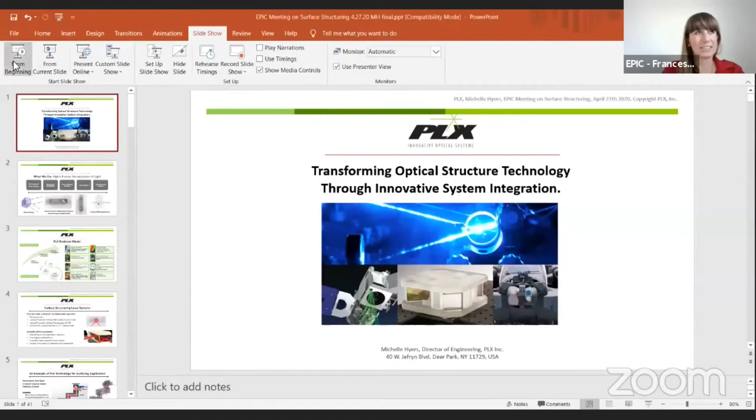Thank you. Hey, so I'm Michelle Hyers, I'm the Director of Engineering at PLX. I'm just going to talk a little bit first about what we do: the manipulation of light.

There have been a lot of talks today presenting how to get the laser beam for surface structuring, so this is a really good application of what we do. Anything regarding beam delivery at really high precision levels, we're talking about sub-arc second, we do a lot of applications in targeting, bore sighting, beam folding, steering, laser systems, interferometry, some of those beams you guys were using for interference to put down those patterns.

We have all different versions. We're really the pioneers of what we call this retroreflector, these invariant optical systems, to basically have the path, shown here on the bottom left-hand side, coming back with these small deviations. And we have all these other systems we've developed: lateral transfer, hollow retroreflectors, periscopes.

But really the heart of what we do, shown on the bottom right, is all these different types of custom OEM applications. So whatever system you guys have, we would provide the solutions that would work for you.

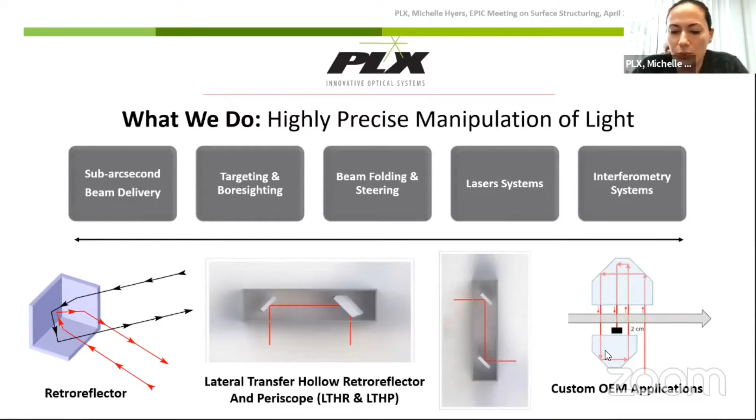In our business model, we really work at the level of assemblies all the way up to system integration. So if you guys have this custom application trying to develop a new laser system for this surfacing, we can really help integrate our technology for your maximum benefit, all the way up to the housing system level.

What we're looking for at EPIC here, and in general, is to really work with our technology and find these key partners that can utilize our technology and work with them to develop different applications.

What we do in-house is engineering, utilizing our technology and expertise to do these high precision optical assemblies and solutions, analysis of those systems with FEA, a lot of environmental testing, thermal vibration shock, and fabrication. We have the optical shop, assembly, coating, clean room, everything you need to really bring that solution and make it.

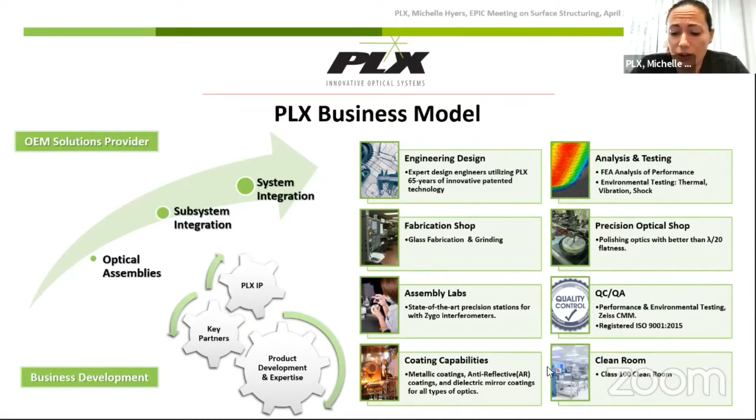That's our proprietary know-how. So in regards to this topic, let's look at some of these systems. For surface structuring, you want to basically deliver the beam and have different benefits of the system. Some of the things we use that are our main core solutions are all these invariant systems. I'm going to talk a little bit about the last one, the MOST, at the end.

There's pentamirrors, there's the LTHR, LTHP that I talked about before. And the MOST is shown on the bottom right. That's really one of our main core technologies: a monolithic structure. Again, invariant, all being very robust in terms of vibration and thermal concerns.

With this solution, we can provide a bunch of different benefits for these laser systems. We can use multiple laser systems. So if you want to switch different beams or use multiple beams, the benefit of the MOST is that it's pre-aligned. Everything in this kind of sandwich structure on the bottom right can basically be put into the system and is extremely accurate. The overall beam deviation goes to the sub-arc second level.

So you can basically put in this kind of plug and play optic, you don't have to worry about adjusting everything. And it's very highly stable in thermal and vibration conditions. If you're worried about doing high scan speeds, high power heat issues, or vibration issues, these sort of products are used - a lot of our applications are actually military defense, so these are battlefield condition-ready optics.

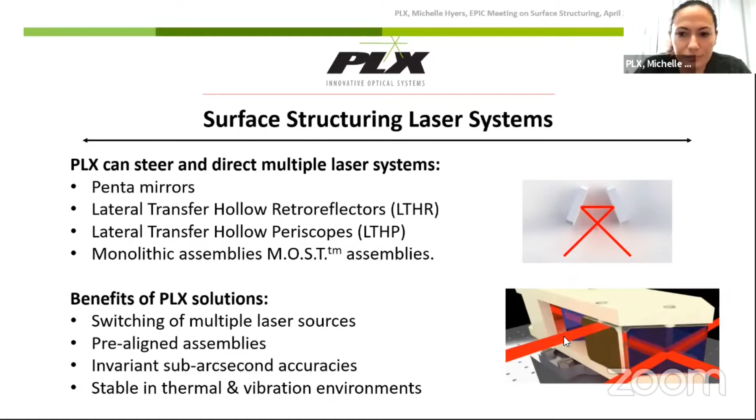So an example to look at, to see what our optics and solutions can do in this industry: we can look at something like an articulated arm to deliver the optical beam for a laser. In this system, maybe you have two laser beams that you're going to either split between, or it could be an interferometry kind of setup where you can basically have different optics.

This is just one example. We have a pentamirror, but this can be all different types of optics in that first section. And then we can use basically some of our LTHP, stacked in this kind of articulating arm setup, and we can do multiple axes.

But the benefit of this is this invariant system. Because of this, if there's any kind of slight movement or deviation, there aren't these alignment issues that may plague your system. So you should be able to get a much higher accuracy at the beam delivery site. With this, you can move the beam around, you're not moving the workpiece, so you can potentially make a much more compact laser system.

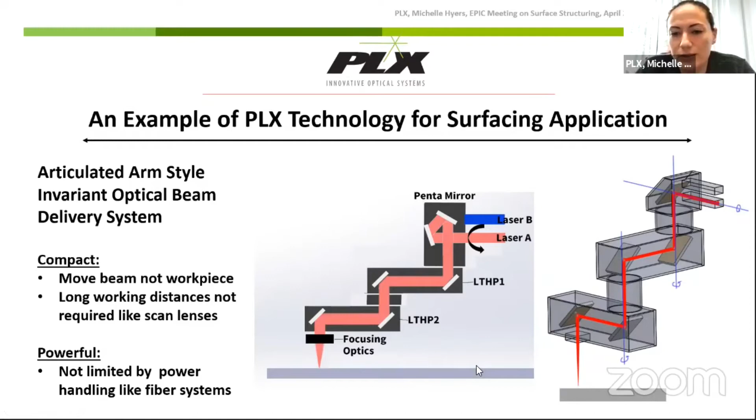If you're doing this instead of something like a scan lens system, you're not necessarily required to have the long working distance, so the system could be much more powerful and compact. It's not limited as much by power handling issues like fiber systems - a lot of its benefit is we can deliver high powered lasers with this. This shows you on the left the physical layout, and I'm going to play this little animation here on the right, hopefully you guys can see it.

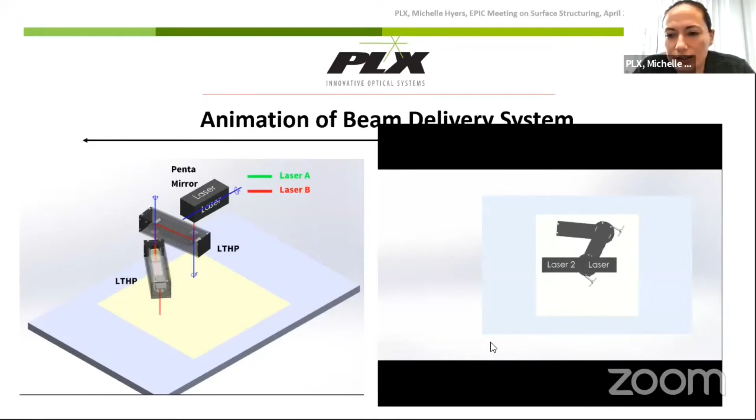So it just shows basically, taking a system, combining some of our high precision assemblies and having a very robust system for laser scanning on the surface. We can do multiple configurations. This is just to give you an idea of one possible version.

With this system, there's a lot of benefits PLX can offer. Because they're front surface mirrors, you have wavelength independence, so if you want to quickly switch amongst different lasers or wavelengths, that's perfect. Beam diameter is usually around 1 to 2 inches, but we can customize it to different scales, so you can get a large power density and low divergence.

The structural design has our elements enclosed and pre-aligned, so you get accuracy. The beam deviation and invariancy I talked about are really important for performance, and that comes with a lot of stability. Most of our systems use athermal designs with CTE-matched materials, so thermal issues, vibration, or shock are not going to be a problem in our systems.

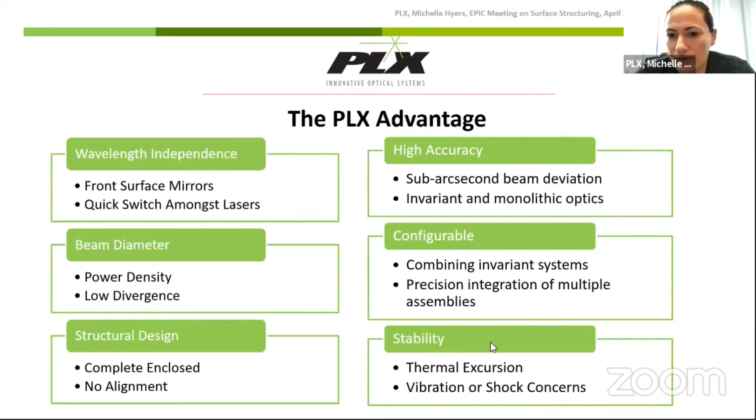So I talked about the MOST briefly, I just want to show a little quick video so you can see exactly what I'm talking about. Maybe it's on the other screen, if you have a second screen. No, it's not doing it. Okay, let me just show you this one.

Basically, if you take a conventional optical bench setup, you can really combine these elements. If you think about this in terms of a surface structuring system, you might have all these different elements that are moving and being adjusted, so there's a lot more room for error and inaccuracies, especially if your system is scanning really fast with vibration and other factors. This really takes those elements out of play and puts it into this kind of sandwich structure.

This is extremely customizable. We've done all different types - this example happens to be glass, but we can do other materials, metals, ceramics. We can do different elements, freeform optics. This could be mirrors, beam splitters, lenses, anything you can configure can be put into this technology.

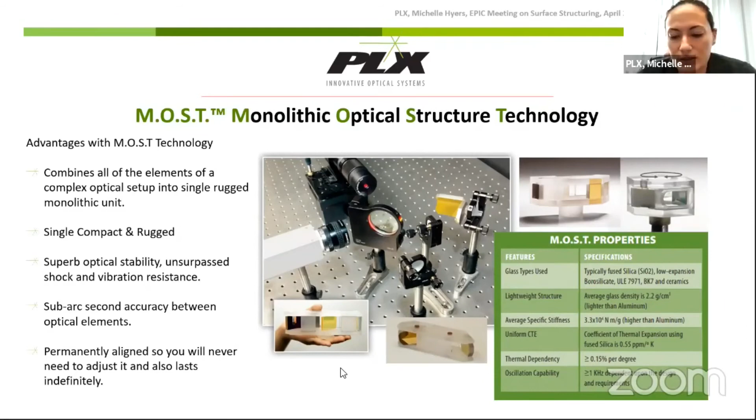Because it's in this one structure, this is very robust. You might think glass isn't as strong, but that's completely not the case. These things have been tested and used in very harsh conditions - vibration, shock, and large thermal ranges. These might be in something shot up into space, or for military applications.

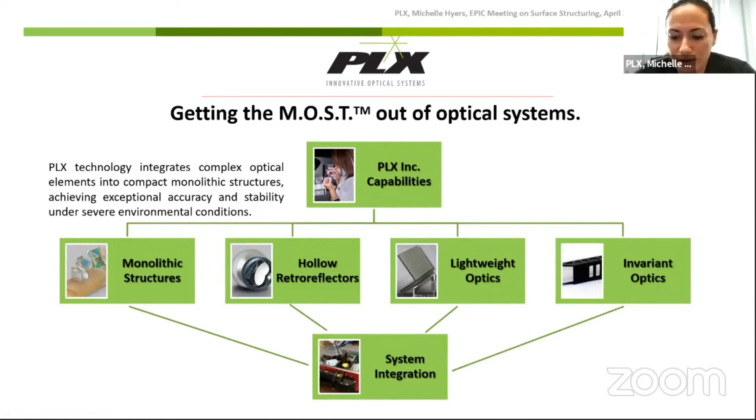I think in this industry, it would be a great fit. All of these different elements of PLX - the monolithic, the retroreflectors, lightweight optics and invariant optics - really come into play at the system integration level, and that's where we can provide the most benefit for you developing these sorts of systems.

Just to give you a quick range of what we can do scale-wise, wavelength ranges, beam deviation, and sizing. Depending on the scale of your system, we've made things very small, down to let's say 2 millimeters. We've also done some opto-MEMS in this industry. And then things up to offset - we talked about spacing of the beams - we can go up to basically meters as well.

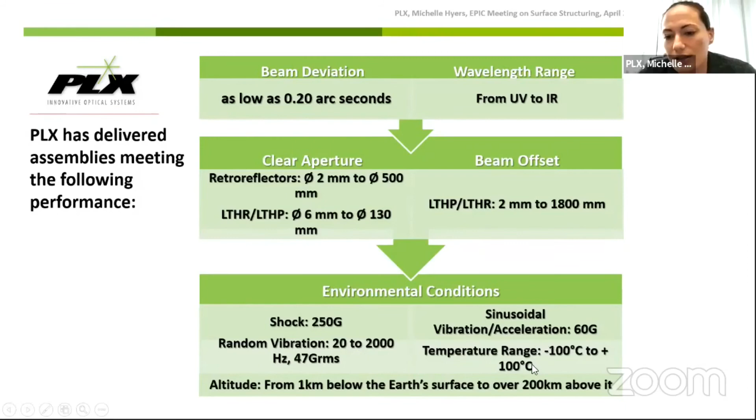And environmental - I mentioned the shock, I mentioned the temperature variation. These are just some of the numbers so you can see what we're talking about in terms of shock, vibration, and temperature range. This is to show you all the different versions of some of the things that we can do.

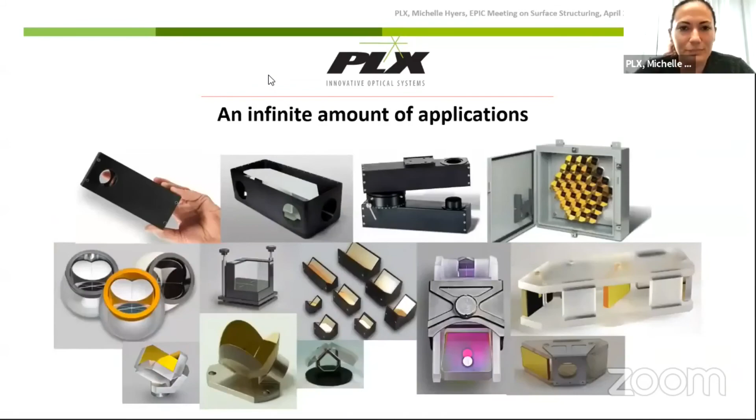Thank you very much, Michelle. Thanks a lot for your contribution. I think it's very interesting for this community that the high power - your systems can stand the high power. You've also put a lot of weight on harsh environment applications. Maybe this isn't for the laser structuring people, but I know, for example, Dietmar also deals with devices brought into different environments. So I guess you gave a nice overview for everything that can be needed for other side projects of this audience. It's very good.

So are there questions for Michelle? If not, someone? No, okay. I guess, Michelle, you also have the possibility to have a lot of contacts here.

Do you want to comment on some collaboration you would like to have, or maybe some speaker before you thought about? I think several, if you're developing laser systems, we have a lot of applications for you, and we're always interested in partnering with you to come up with new emerging technologies together. Just reach out to me and we'll figure out a system for you. There's nothing we say no to trying to develop using our technology - there's so many applications.